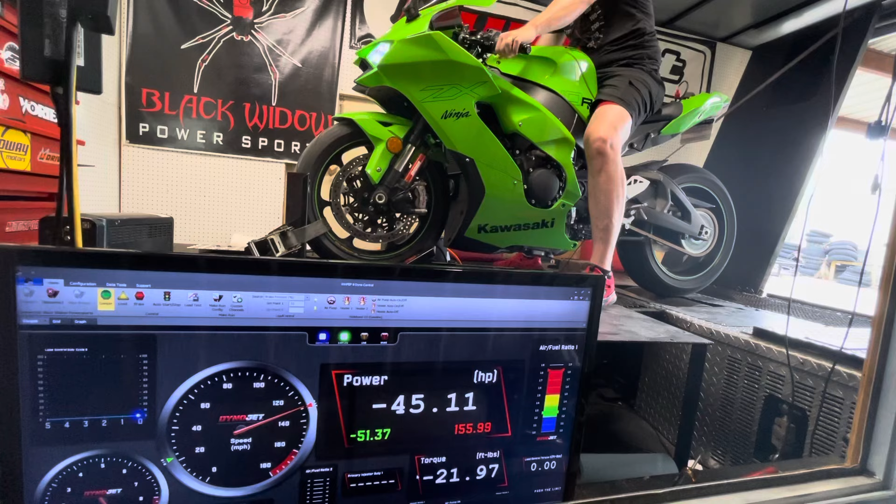We got an 11,000 RPM rev limiter that's got to go bye-bye.

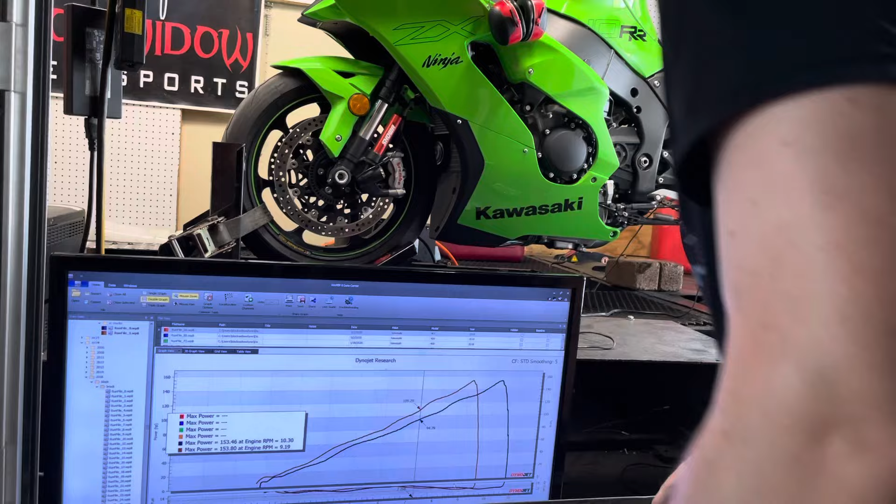We are currently flashing the ECU. It's a hurry up and wait process. The last one of these took, not the RR but the regular one, took 10 minutes just to write the flash. So each round of changes is 10 minutes, which is fun.

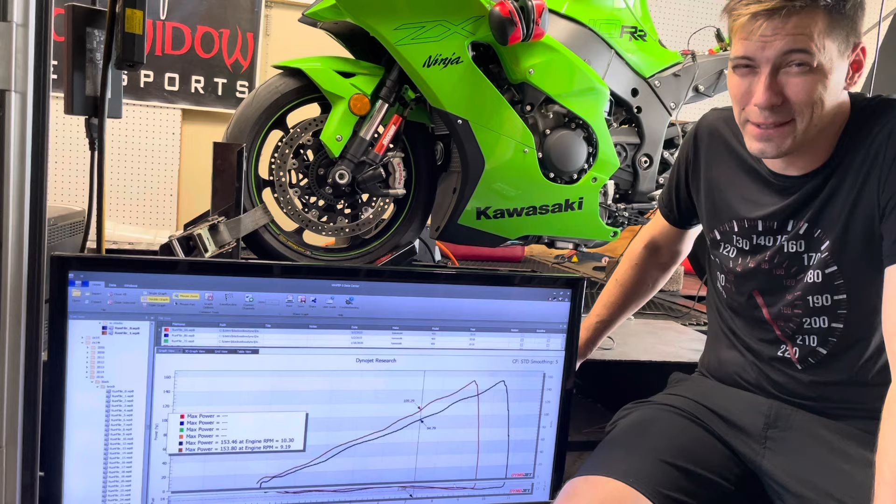Anyway, it's a more advanced ECU. They don't get to have a full graph of what she can do, but let's see what it'll do after. This thing is gonna fly.

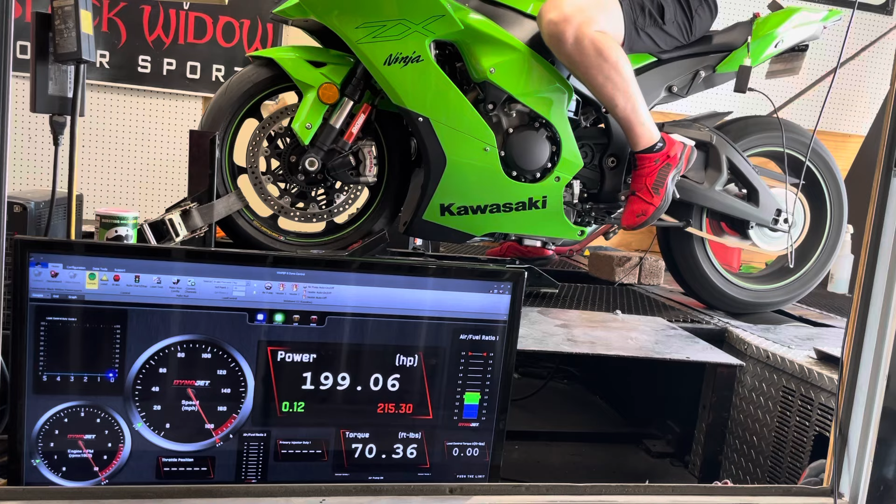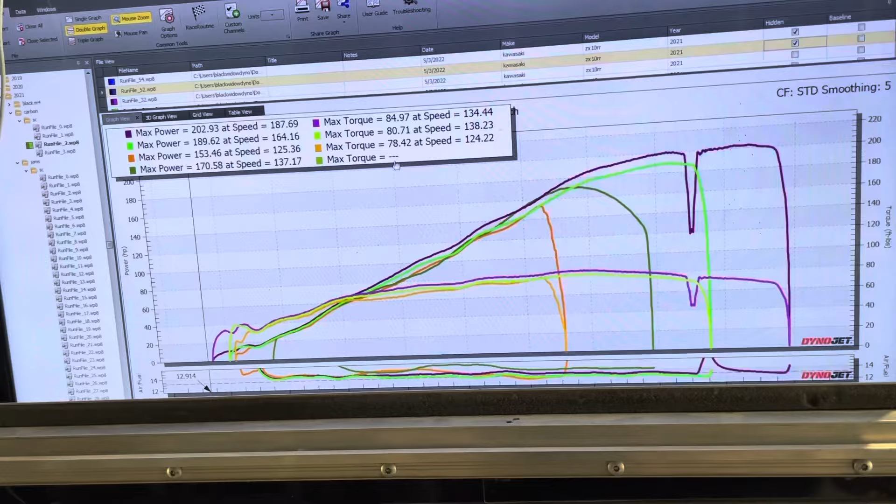Here's the before and after stuff on gasoline, on pump gas. The complete before, but the orange run is what we saw in the video that I have early on. And then the bright green is tuned on pump. And then purple is a ram air run on pump.

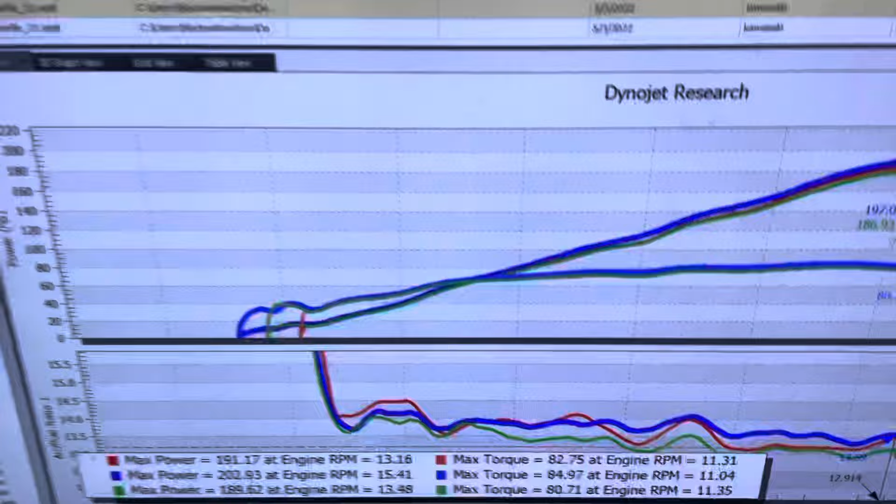That's the end of the gas run. We got 191 without ram air and 203 with it. So really close to what the non-double R does.

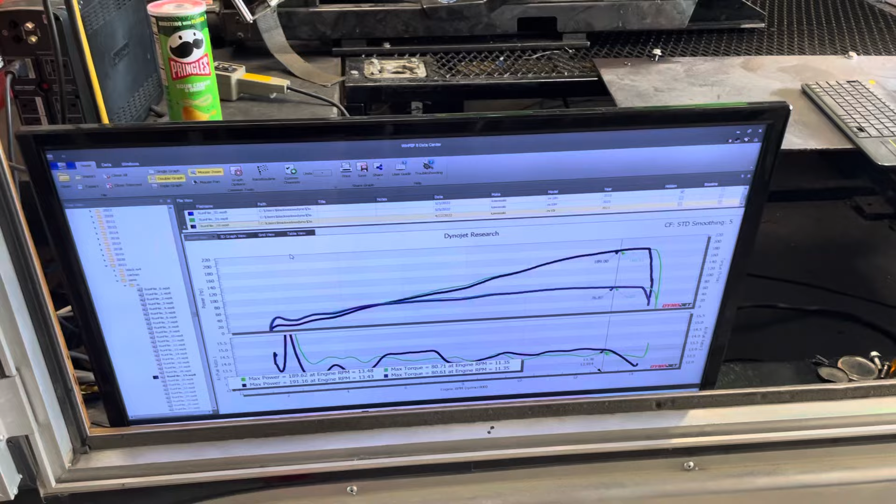Let's get some E85 in it and see what she does on that. I imagine she's going to love it. All right, E85's in the tank. Let's go, see what it'll do.

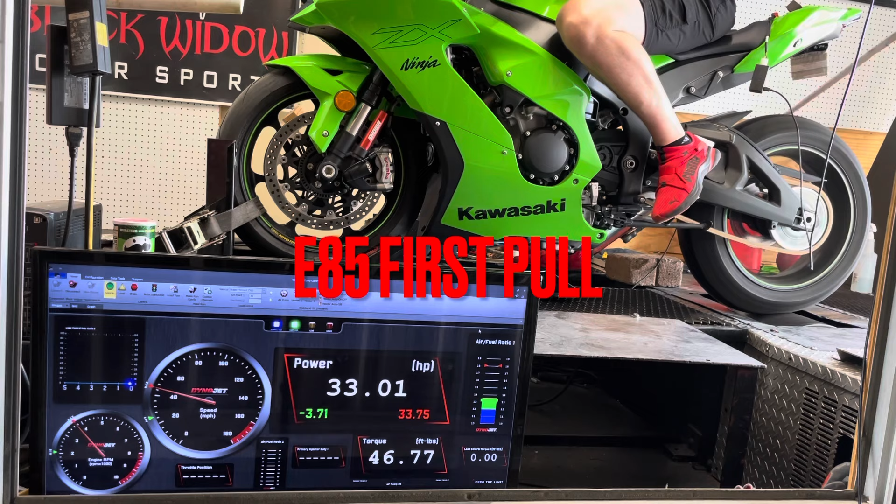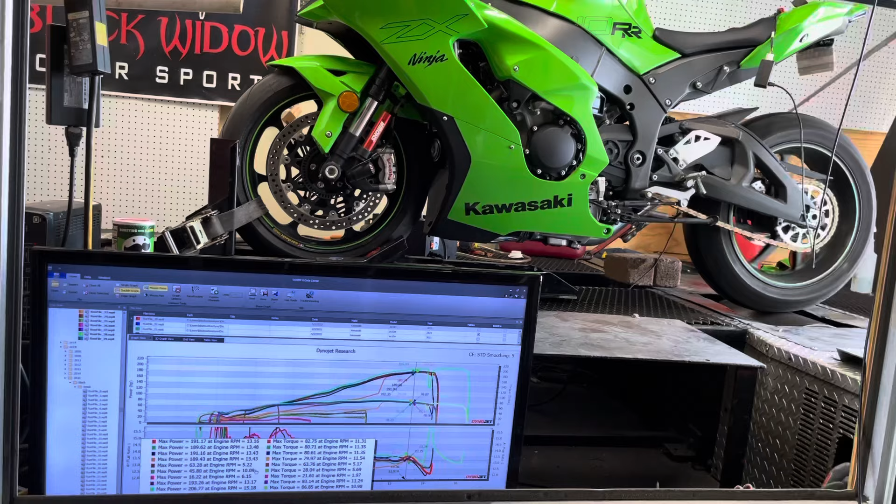That was the E85. We're pretty close. A little bit of tweaking should be done.

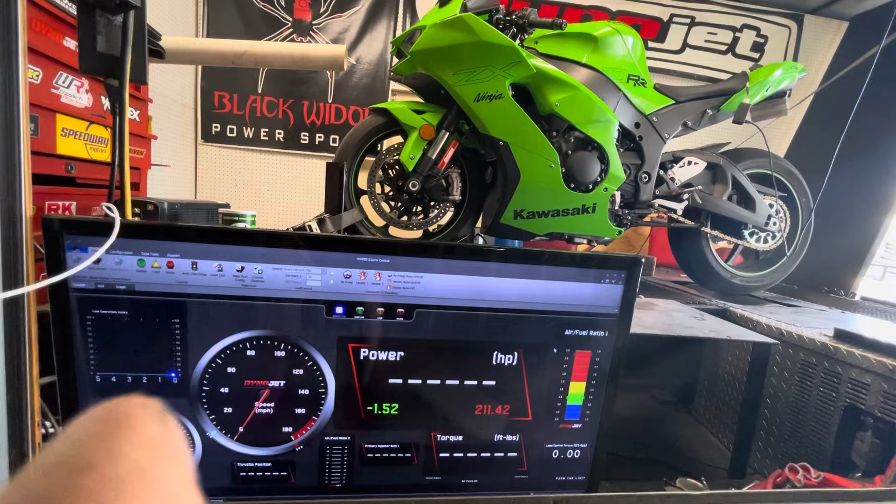Multiple runs over 200. She pretty much makes the same power as the other one. It goes special sauce.

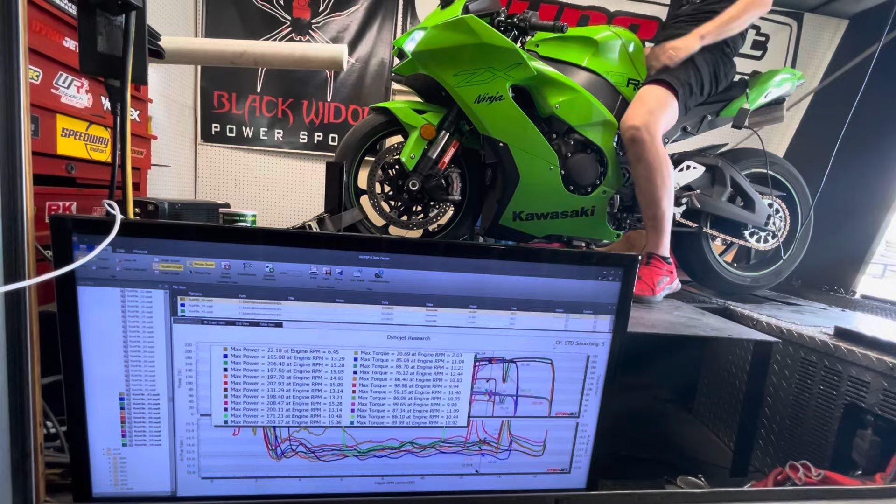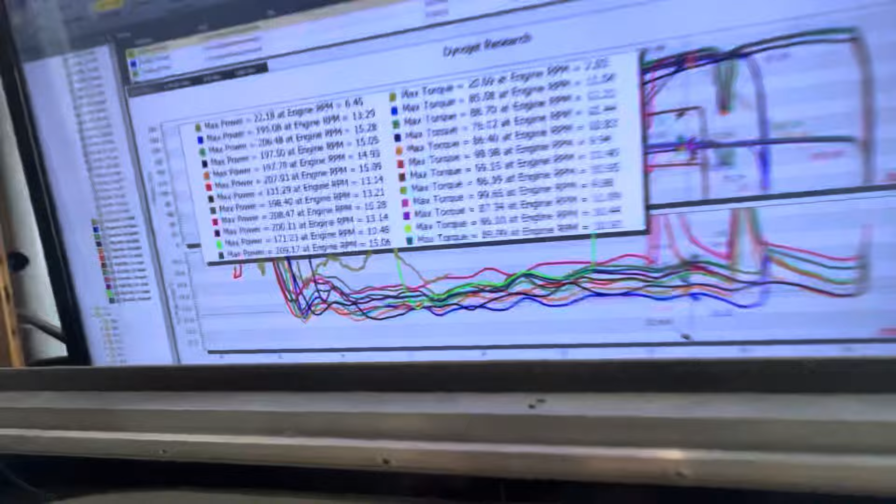Explain a little bit of this. So that last run that you just saw, now we have the green, which is pump, versus E85. Those are the differences between E85 and pump, and then the darker green is E85 with ram air.

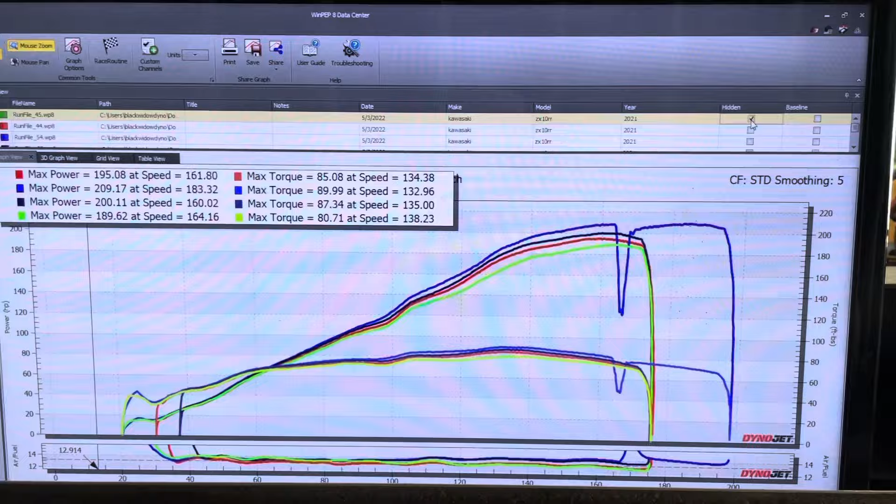Now we have our methanol mix. This isn't what we usually run, but this is what is compatible with the E85 tune. So no additional fuel or ignition timing was added in this particular run. 200 horsepower, 87 foot-pounds of torque with no ram air, and 90 foot-pounds of torque and 210 horsepower with ram air.

As promised, here is the difference between the RR and the R. Granted, the client did say that this has velocity stacks in it, so it could be just the tuning difference between the velocity stacks, but the brown graph is the R and the red graph is the RR. So we're making more torque down low, pretty significant torque gain down low compared against the R. But we are losing a decent chunk of horsepower at the top.

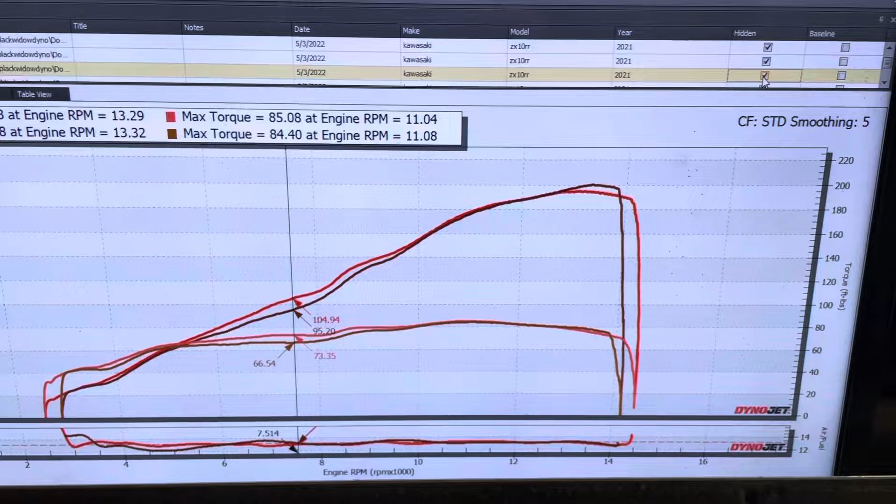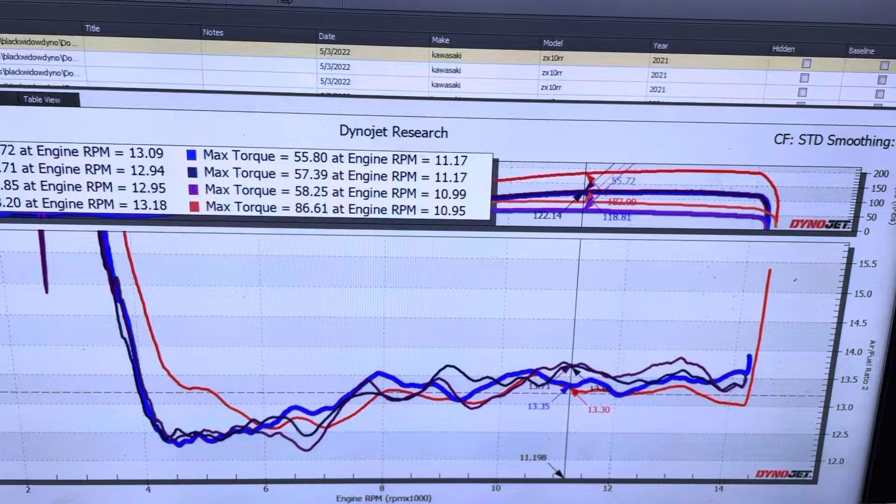This may be able to be resolved by tuning per cylinder, but that's a level 3. What we have here is a zoom in of each cylinder individually, sniffer going up each pipe, so we can smooth out the differences between cylinders, because this does not have factory stacks on it. These are the carbon Smiths as far as I'm aware. Need to add that into the other data.

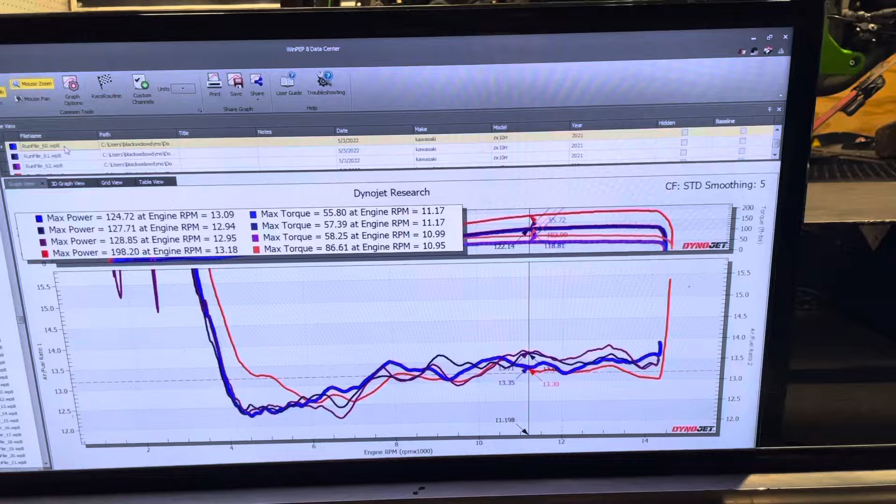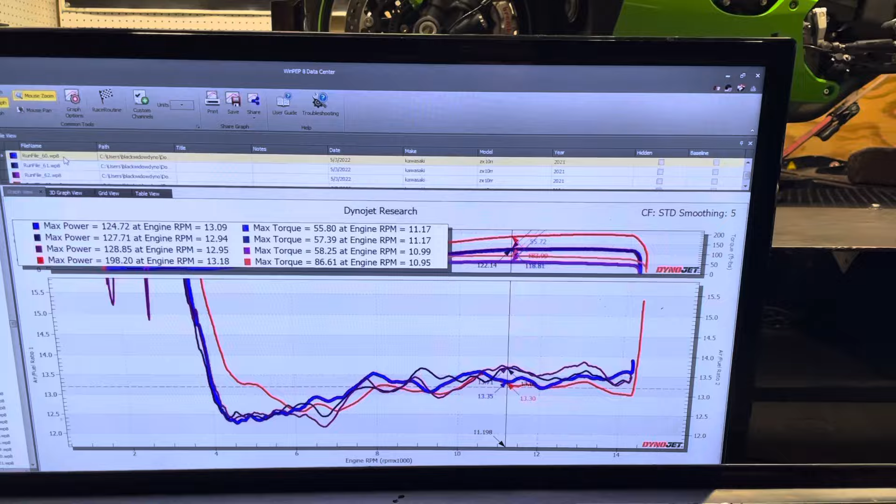That is also why this thing's making more low or mid-range torque than the other model, and probably also why the peak horsepower isn't quite there. Extra things in the way are obviously going to reduce horsepower, but these changes should help pick that peak up a little bit.

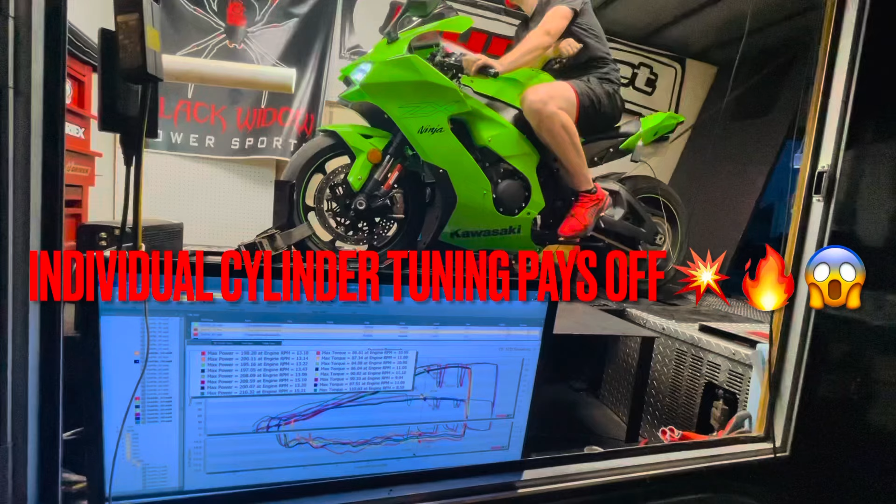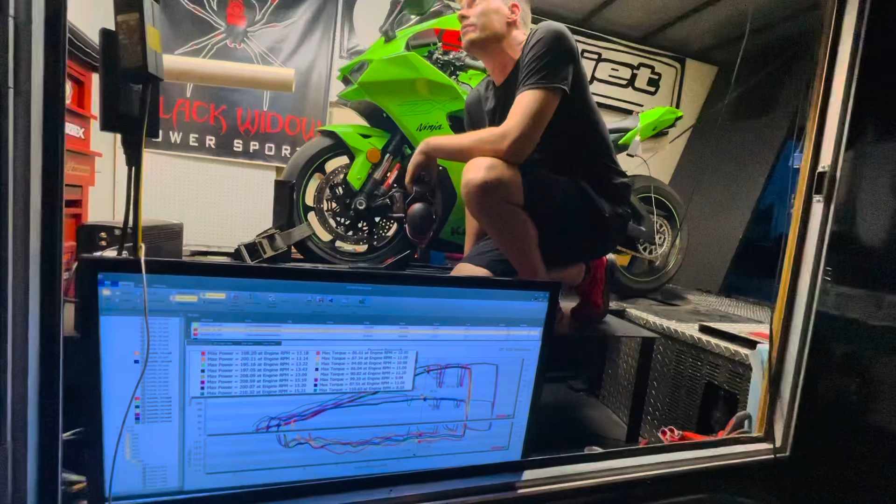So we went in, did some individual tuning on each cylinder. That was the result of that. All the graphs are showed later on, or earlier before this part. This is the extra. This thing's now a level 3 because we tuned by cylinder for these stacks.

You know, if you got these stacks and you need them for a mail-in or whatever, we can probably get that done. I'm happy about this thing, making a boatload of torque, a lot better than stock, or a lot better than the stock setup. I do like these stacks, but as far as peak absolute horsepower, the factory ones are better.

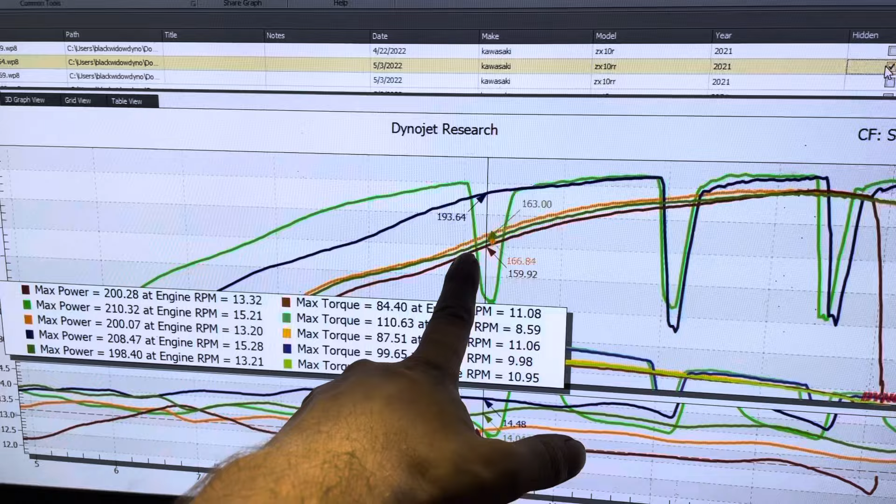So we got the before and after on the individual tuning, so the level 3 versus the level 2 tuning. That's the yellow is on our level 3 and the green is our level 2. Same day, just an hour apart from each other.

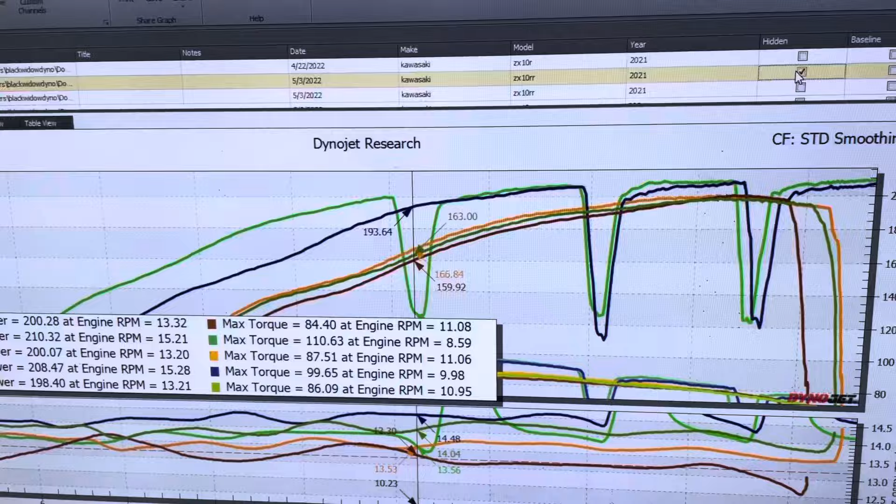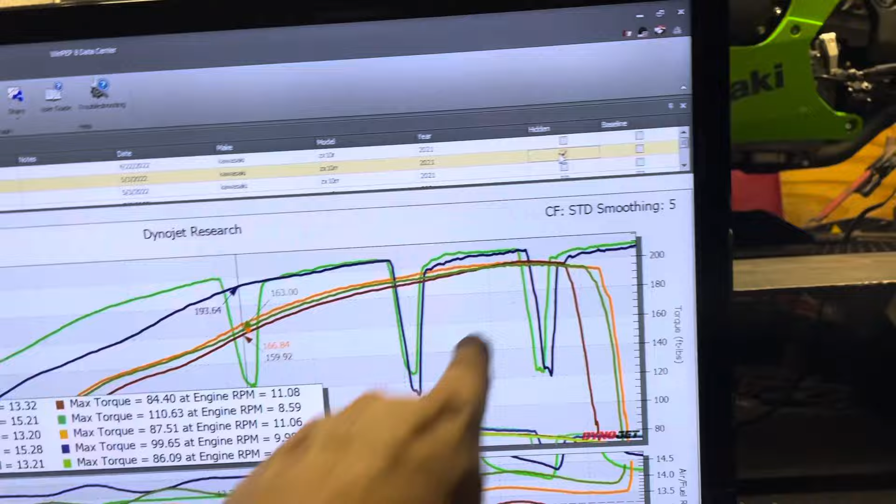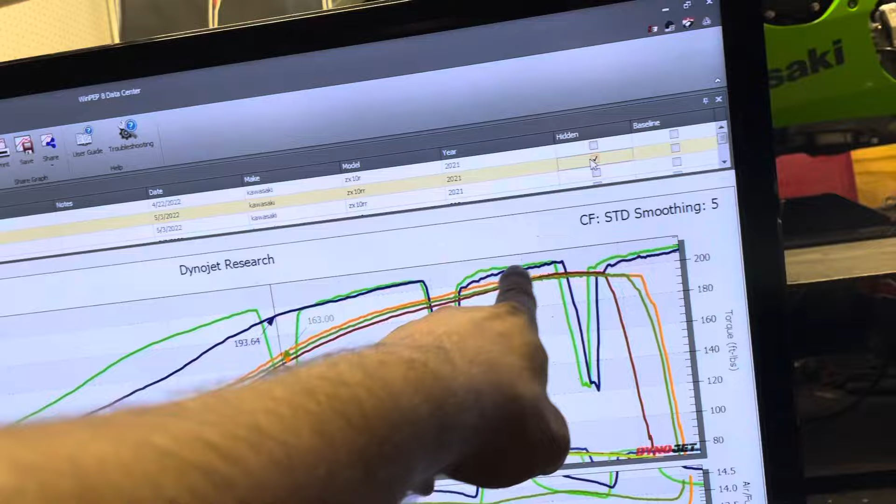So that difference between each cylinder is worth a couple ponies across the board. That's three, almost 4 horsepower at that spot right there, and that carries through most of it. Peak got a little bit better, and then on the multi-gear pull, we gained 2 horsepower peak on the multi-gear. We got gaps there, so it's gaining everywhere by that multi-gear setup.